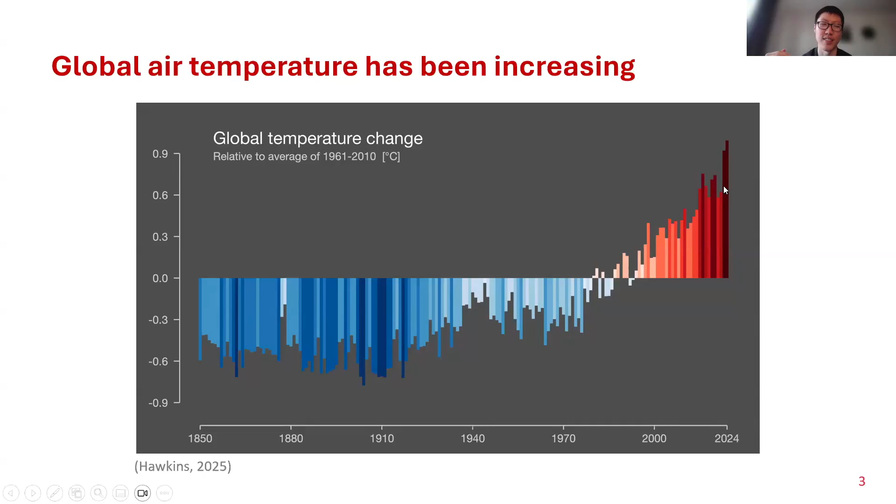When we look at the exact value of global temperature change, we can see that since around the 1970s, the global air temperature has been increasing rapidly, and until recent years we have reached several peak levels of air temperatures.

Heat will cause death because as temperature increases, firstly people will feel discomfort, then get heat stress and even heat stroke. Eventually that will lead to death, especially for vulnerable groups like elderly persons.

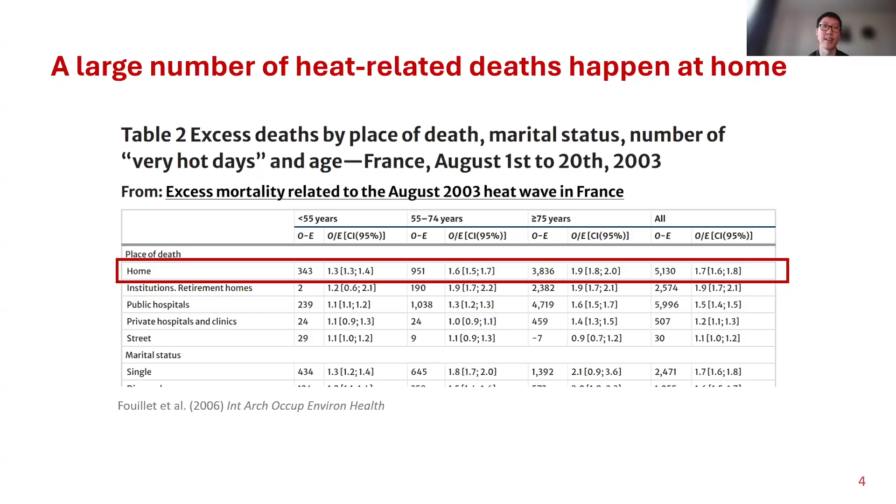That makes us more cautious about the heat resilience of buildings because, for example, in the UK or other European countries, traditionally we've focused on heating, but nowadays overheating is becoming a new issue. There are lots of studies recently focused on overheating of buildings, and guidance like the CIBSE Environmental Guide A has started to have more detailed standards or criteria to assess indoor overheating risk.

Building simulation is an important way to assess or predict building overheating risk, and also to assess the impact of different passive cooling interventions or even energy saving potential for cooling. But for building energy simulations, the important input variable is the outdoor weather condition.

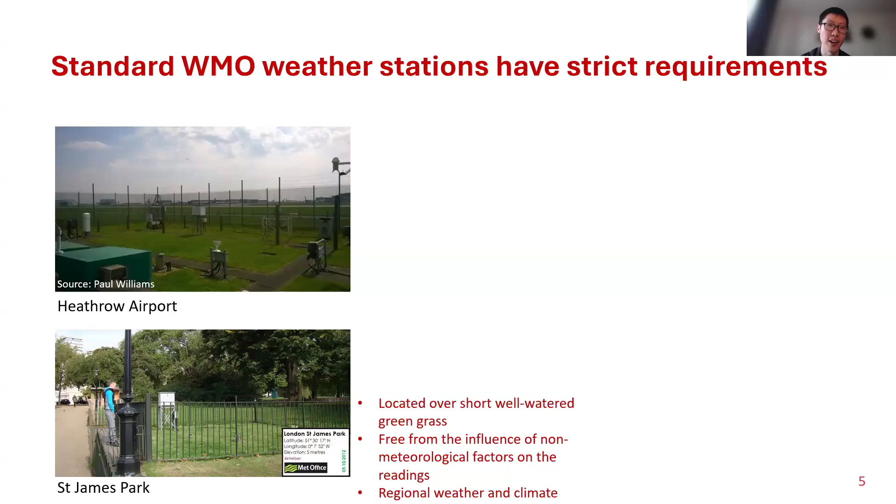Typically, how we get the weather data is from rural weather stations. For example, we use the typical meteorological year data, which uses the last maybe 30 years of data from standard WMO weather stations. But the location of WMO weather stations has strict criteria. Typically, for example, for London, we have lots of standard weather stations.

For example, the most famous one probably is Heathrow Airport, which is used for weather forecasts as well. And for the city center one, we have St. James Park. But still, we feel that both Heathrow Airport and St. James Park actually have very similar surface types—they're all very short grass. That's basically the requirement of WMO weather stations, because it's required to locate them over short, well-watered green grass, and they should be free from the influence of non-meteorological factors on the readings, trying to exclude factors like buildings or anthropogenic heat.

Finally, the purpose of these WMO weather stations is to monitor the weather and climate on a regional scale. So just like when we look at the weather forecast, it says London is forecasted to have a temperature of some degree to a certain degree—that's typically for a regional weather forecast.

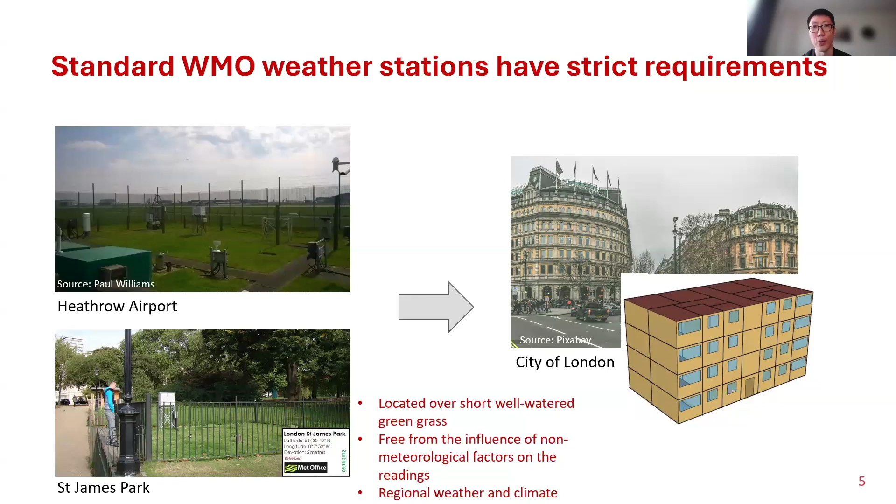But for building simulation, I think in most conditions we are looking at urban buildings, because the city is the form of buildings—most buildings occur in the urban area. But if we are using weather data from relatively rural stations like Heathrow Airport, the question is whether it's representative enough for a building in the center of the city of London.

When we talk about urban climate, one of the most well-studied phenomena is the urban heat island. When I talk to meteorologists about urban heat island, they usually ask what kind are you talking about - the boundary layer urban heat island, the surface urban heat island, the subsurface urban heat island, or the canopy layer urban heat island. When we use the term urban heat island, we usually refer to the canopy layer urban heat island, and these layers relate to another important concept for urban climate.

When studying urban climates, one of the most important things is the scale - which scale are we looking at? For the regional, we have the largest one, the meso scale or regional scale. This is usually used for weather forecasting and covers a whole city and its surrounding areas.

When we zoom in, we have the local scale, or neighborhood scale, comprised of buildings and streets. Zooming in again, we get the micro scale, which consists of the building and its surrounding microclimate. Micro scale is typically what we as building researchers are most interested in, because it's the exact surroundings of the building itself that we're trying to understand. That's also an important input factor for building energy simulation.

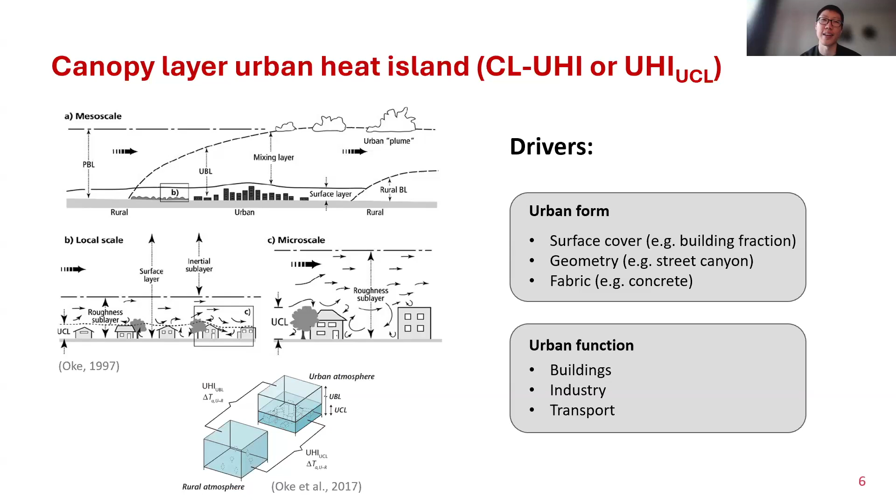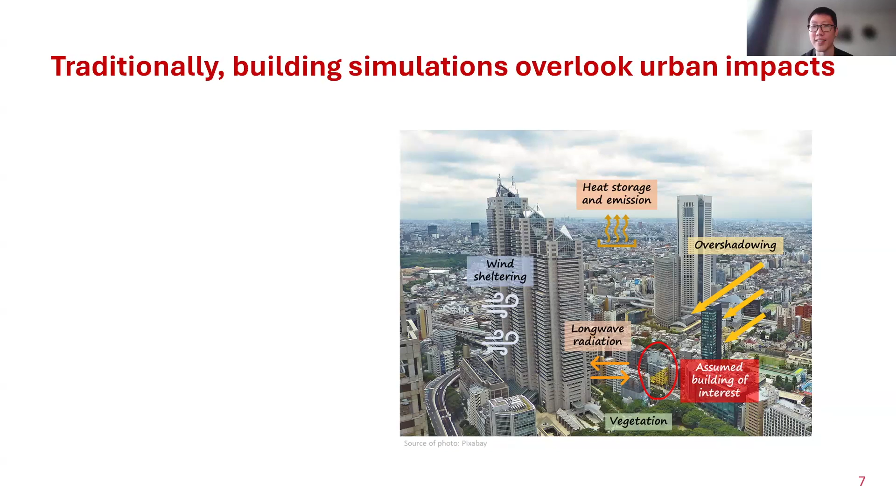Some vegetation areas may provide little cool islands within cities, and the building fabric has heat storage, plus there are heat emissions from human activities. All of these factors need to be considered when simulating a building in an urban area.

When we talk about the interaction between buildings and their surrounding urban areas, typically this relationship is mutual - it's two-way. The urban climate influences buildings in terms of energy performance, indoor thermal comfort, and sometimes indoor air quality. Buildings in turn influence the outdoor climate due to heat emissions or air pollution. However, a gap in existing methods is overlooking the impact of urban factors on building thermal or energy performance.

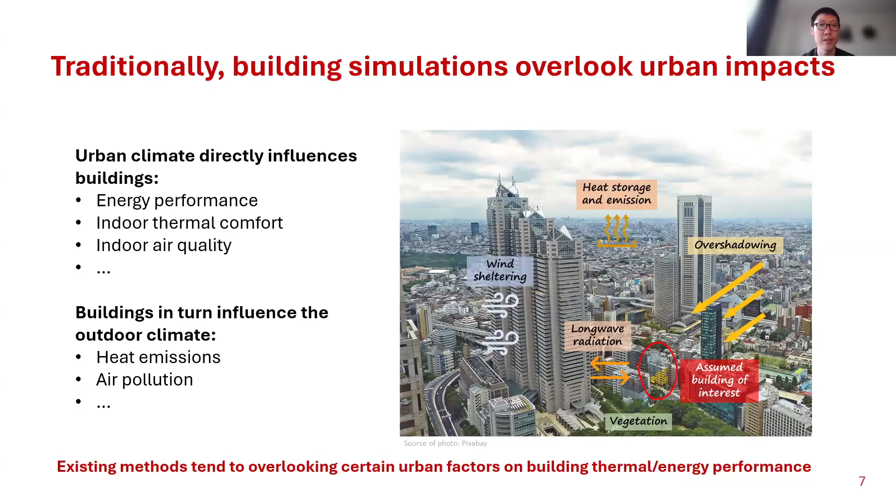The first one is about long-wave radiation trapping. What is the impact of interbuilding long-wave radiation exchange on building performance?

The second is about urban wind and air temperature, and importantly the vertical profiles, because it's not just about the wind speed or air temperature at a certain height, it's about the whole profile. How will this influence the performance of buildings or the input for building simulations?

The third one is the feedback of building anthropogenic heat emissions to outdoors. Traditionally, when we run building simulations, we only use weather data as the input, so it's a one-way process. We input the weather data and get the results, with no influence back to the weather data. But actually, in reality, the building itself also generates heat, which influences the outdoor climate as well.

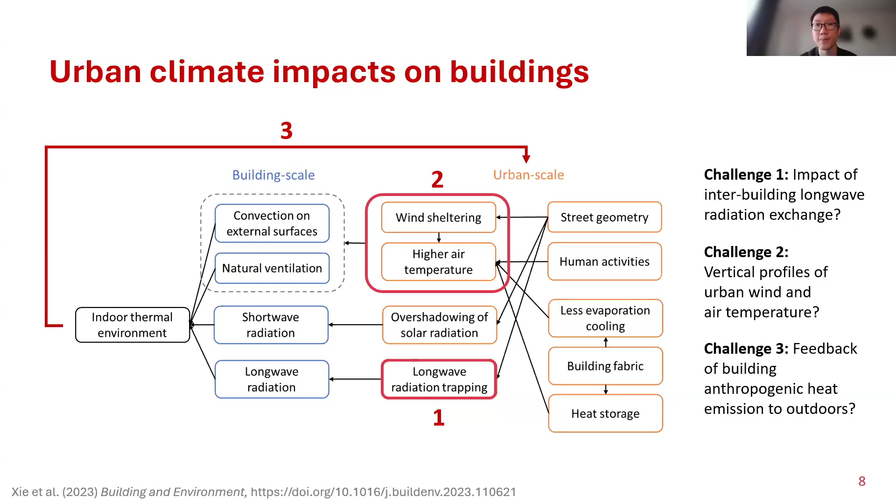So these are three challenges in terms of building simulations. We'll talk about these one by one. First, the long wave radiation.

A typical assumption in lots of building energy simulation tools is that the adjacent building surface temperature is equal to the air temperature, because it's very difficult to obtain the actual surface temperature of the surrounding buildings.

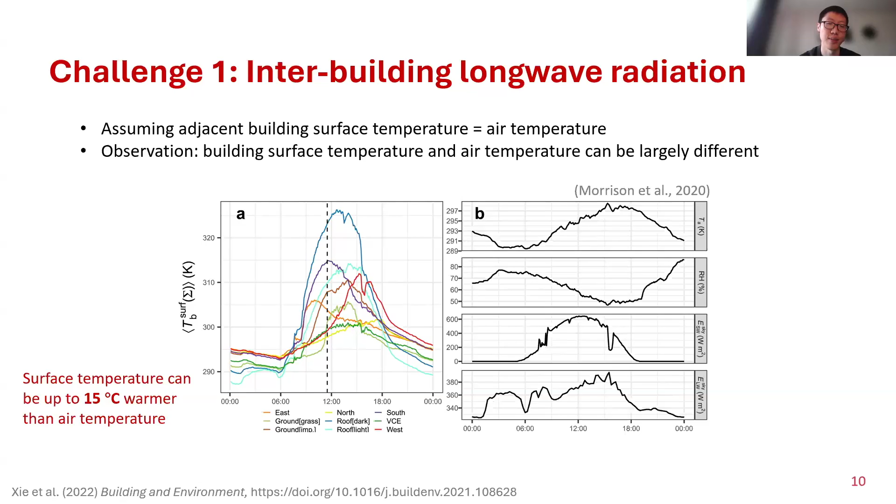There are some existing methods trying to model the interbuilding long-wave radiation. The first one is coupling with urban climate models. For example, there are studies coupling building energy simulation tools like EnergyPlus with urban climate models like ENVI-met.

But this is typically complex because models like ENVI-met are CFD-based, so they're very computationally expensive. Running a model like this typically takes lots of time. For example, running a 7-day case will probably take more than 3 days.

Another way is for building energy simulation tools only. Tools like EnergyPlus make some assumptions to compromise. Firstly, assuming the adjacent building surface temperature equals the air temperature.

That's the default option in EnergyPlus, and it's the most widely used assumption in most studies. Or secondly, assume that adjacent buildings are isolated, so they have surface temperatures as an isolated building. But both methods can cause large biases due to the difference between air temperature and surface temperatures.

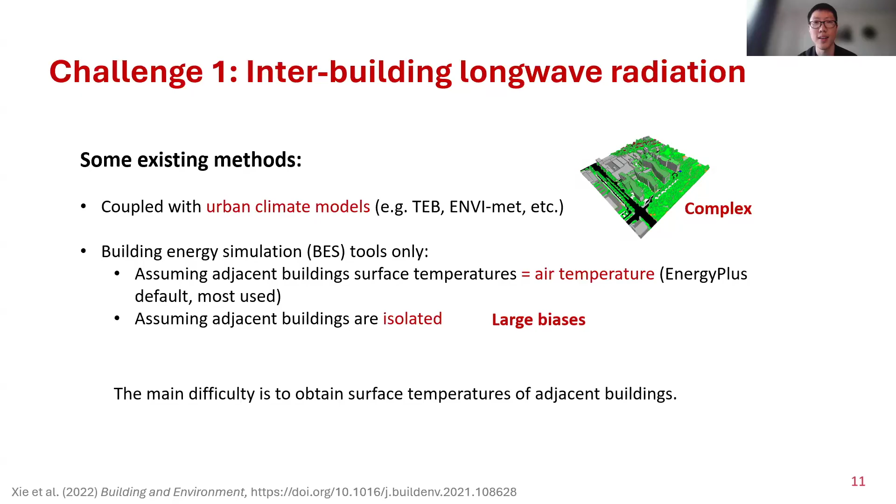Still, the main difficulty is to obtain the surface temperature of adjacent buildings. Here we propose an approach using an iterative method, assuming we have the building in an idealized neighborhood made of identical buildings.

In this case, we assume that all the buildings should have the same surface temperatures. For example, the surface temperature of the south wall of the target building should be the same as the south wall surface temperature of the adjacent building, because all the buildings are assumed to be the same.

It's still a compromise, but it's one step ahead from the default assumption. Using this approach, first we assign the initial surface temperature to the surrounding buildings, for example whether it's the air temperature or the isolated surface temperature, and we run the simulation.

In this case, we need the view factors and the surface temperature as a schedule to be input to EnergyPlus. There's a function called environmental parameters in EnergyPlus which could be used to calculate the long wave radiation. By doing so, we can get the updated surface temperature of the target building, which already considers the effect of long wave radiation from the surrounding environment.

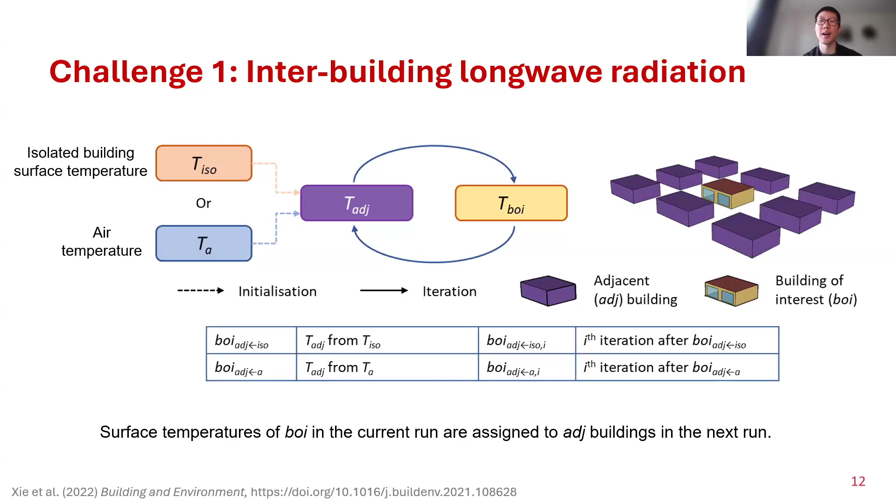We have validated our results with observations. We used a concrete block site located in Japan, which has observations of the surface temperatures of these blocks. This basically shows a similar setup to our assumptions, which is the idealized neighborhood with identical buildings.

When we compare our modeled surface temperatures of each facet with the observations, we found that using the default settings, shown in blue, which assumes surrounding buildings have surface temperatures equal to the air temperature, will largely underpredict the surface temperatures of these concrete blocks. By using the updated, iterative approach we've proposed, we see some increases in surface temperature, making the results closer to the observations.

But still, we see some gaps here, which can be due to differences in the ground surface temperatures or the thermal characteristics of the concrete and so on. Still, we see improvements from the default method compared to the observations.

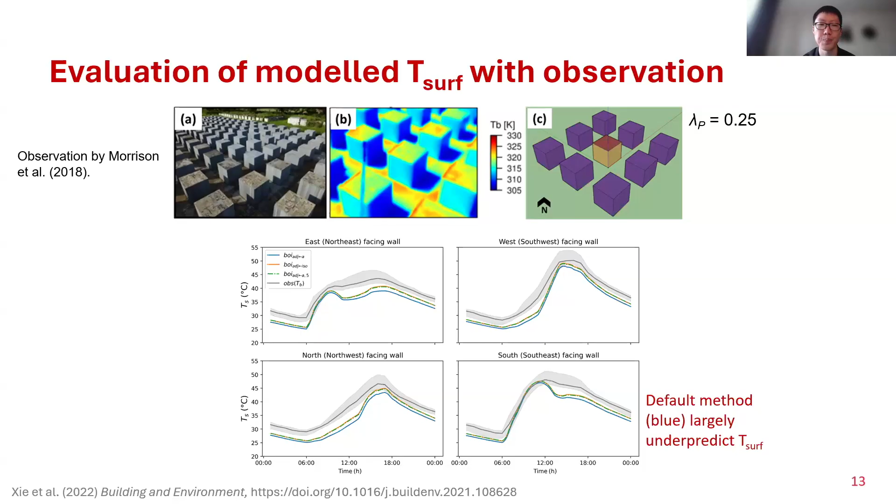We are interested in how the long wave radiation exchanges between the target building and surrounding environment will impact the building itself, because this has largely been overlooked in past studies.

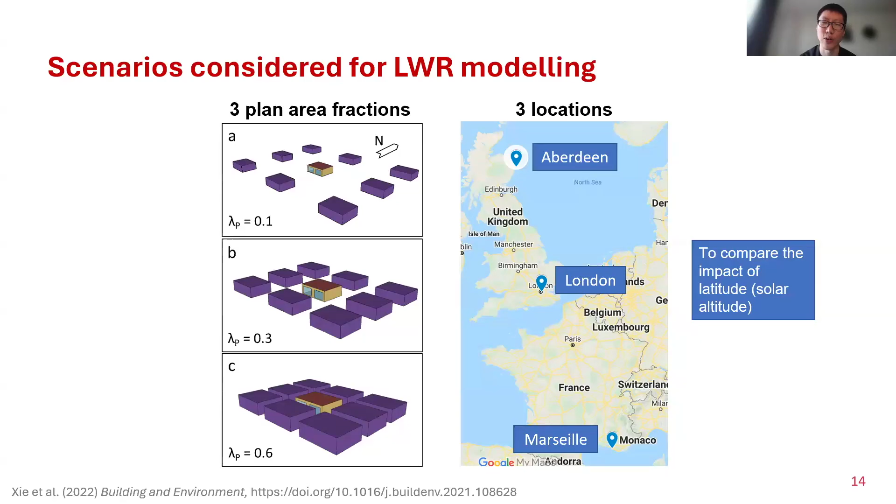So we consider three plan area fractions for building densities, from 0.1 to 0.6, representing a typical open space to a typical dense neighborhood. We also consider three locations: Aberdeen, London, and Marseille. These three cities have similar climates but different latitudes, allowing us to compare the impact of latitude or solar altitude on the long wave radiation impacts.

The results: first we look at the north-facing wall surface temperatures at different building densities in London, showing the temperature difference between the updated method and the default method. We can see that in summer, there's a temperature difference of up to around 4 degrees during noon time, with the improved method showing higher surface temperatures.

In winter, we see some differences too, but although the value is smaller, it's still around 1 degree compared to the default scenario. This basically indicates that as the neighborhood becomes denser, the impact of long wave radiation is larger because of the view angle.

The long wave radiation is a function of the surface temperature and the view factor between the target building and the surrounding surfaces. As the buildings get closer, we have larger values of the view factor or view angle, which increases the impact of the long wave radiation.

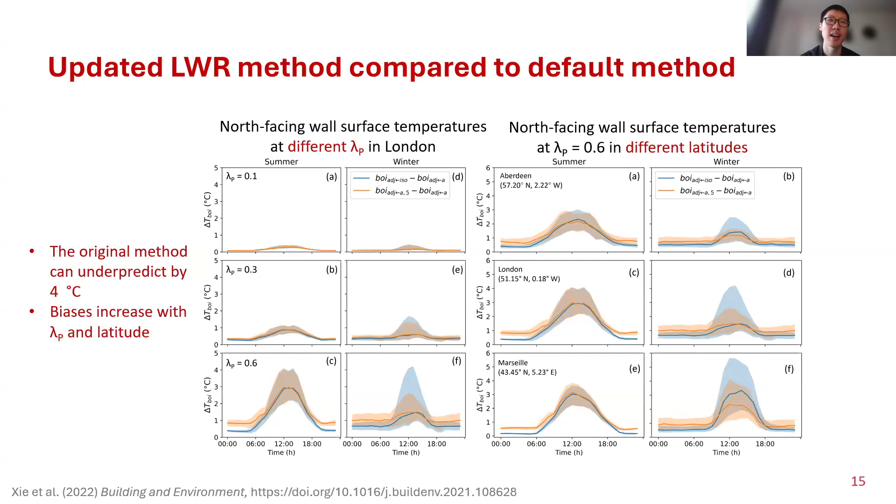When we have a higher solar position, there will be more solar radiation on the south surface of the building, leading to a larger surface temperature difference between the south surface of surrounding buildings and the target building's north surface. This leads to larger differences in terms of the long wave radiation. So this is basically how long wave radiation impacts surface temperature.

Now we step ahead to look at how this impacts the indoors. Here we use the internal cooling and heating load as an example. For London, we set the heating and cooling set points at 20 degrees and 27 degrees, and found that it actually makes some differences.

The load difference between the updated method and the default method shows a difference of 4 watts per square meter for the summer cooling load, and up to around 1.5 watts per square meter in terms of the winter heating load. Looking at the percentage difference in energy demand, this equals an annual cooling energy consumption around 13% higher and annual heating energy consumption 5% lower.

When we think about the threshold set by ASHRAE Guideline 14, which is the criteria for building energy simulation, it's typically an error above 10% that should be seen as large. So for this cooling energy consumption, the 13% difference is something we should be careful about.

Basically, this indicates that long wave radiation, although it has been largely overlooked in previous studies, still should have certain impacts on building performance, especially for dense neighborhoods or low latitude cities, because they're receiving more solar radiation on the surrounding building surfaces.

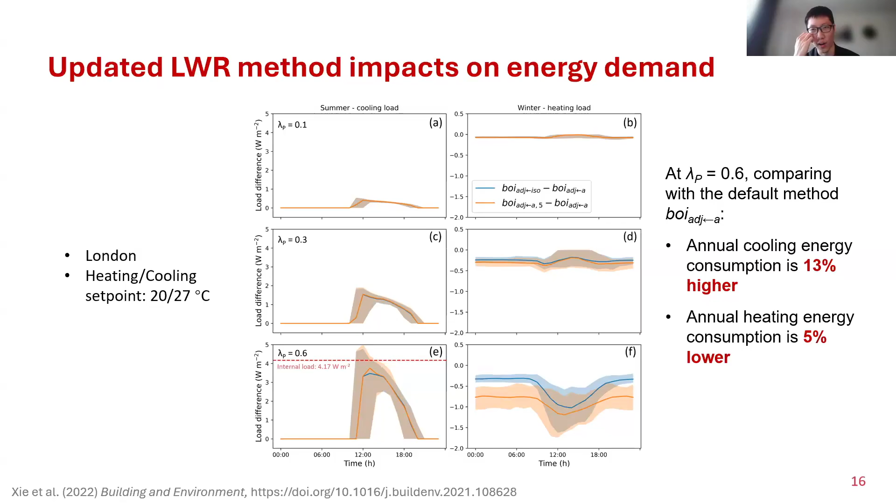The second challenge is the urban air temperature and wind speed, as well as their vertical profiles. How will this impact building energy performance? There are also different ways to assess this kind of urban climate impact.

I'll just start from this slide. Sorry about the internet. The model we are using is called SUEWS, in full, the Surface Urban Energy and Water Balance Scheme.

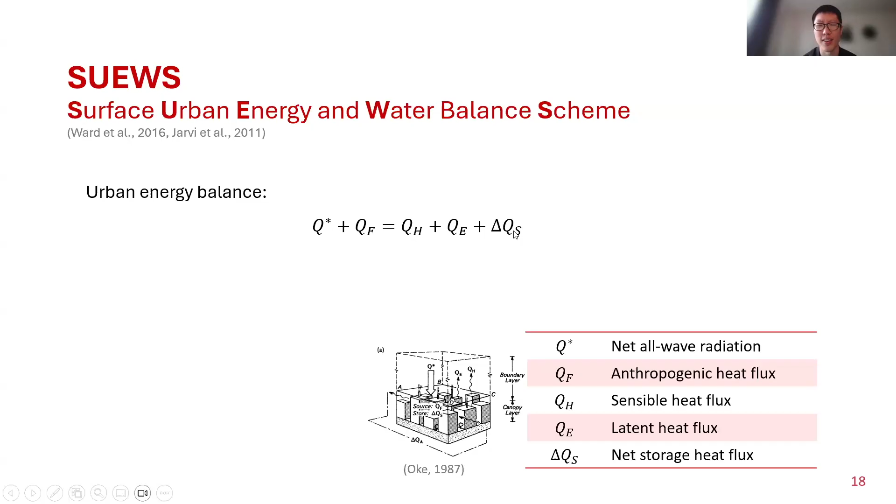It's based on the urban energy balance, where for the urban surface, we have the incoming energy of the net all-wave radiation and also the anthropogenic heat, which is generated from human activities. For the output, we have the sensible heat flux as QH, latent heat flux as QE, and net storage heat flux in the urban surface, which is delta QS.

So how does SUEWS model this? Basically, it requires inputs pretty similar to building simulations like EnergyPlus. It also requires two sets of input data: the first is climate forcing data, and the second is surface characteristics. With this information, SUEWS can model the surface energy fluxes and therefore derive the wind, temperature, and humidity profiles within the urban canopy layer.

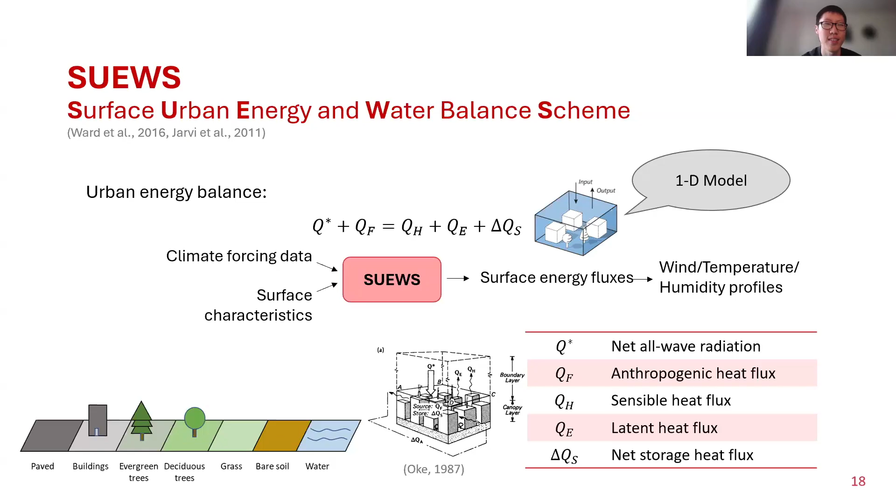SUEWS considers 7 surface types and is a 1D model, which only considers vertical variability, not horizontal. So horizontally it's modeling horizontal average values, but we only have vertical differences. Because it's a 1D model, it's very computationally efficient, and when combined with EnergyPlus it's basically very fast. Typically, running SUEWS for a whole year only takes around 1 minute, so that's very fast.

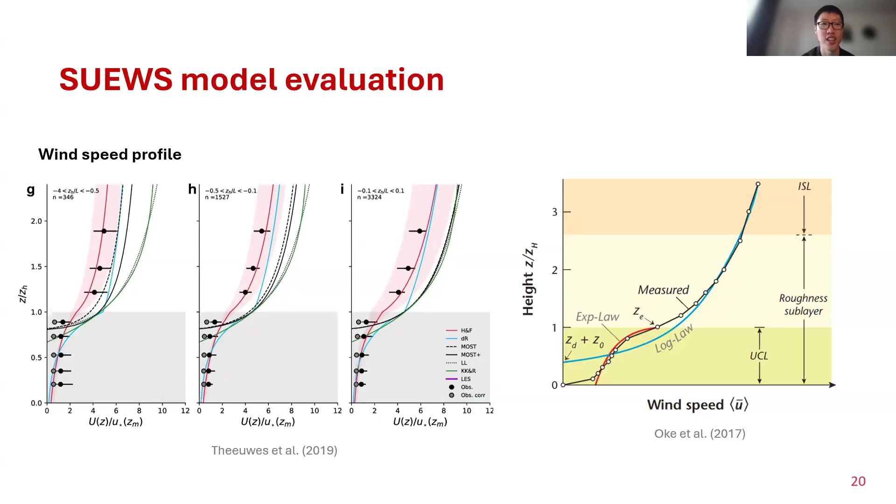Another thing we need to look at with the wind profile is its shape, because typically when we do building simulations in EnergyPlus, it provides a power law profile which has an exponent and a factor called the boundary layer depth. But in reality, the wind profile is quite complex.

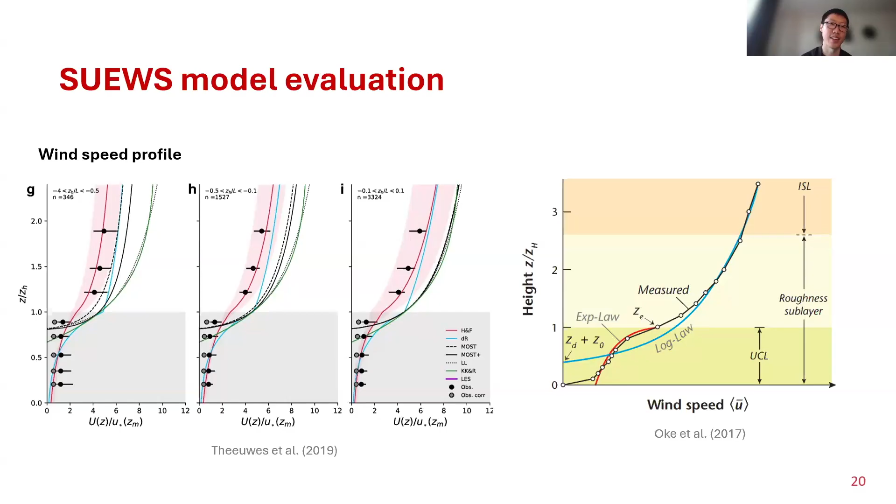When we look at the right figure, the dots show the measured points. We can see that beyond the urban canopy layer, which has the height of the mean building height, the profile follows a log law, but within the urban canopy layer, below the building height, it follows the exponential law. So it's quite different from EnergyPlus, because typically building simulations adopt a simpler format which is easier to use.

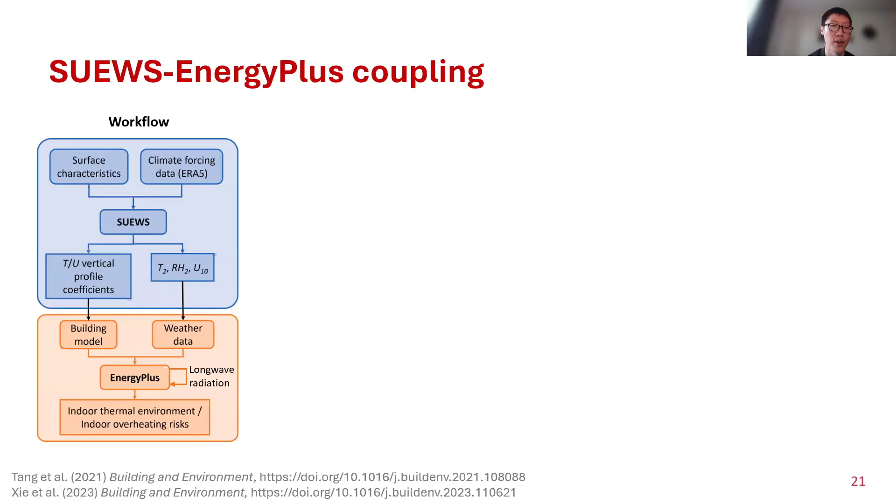The workflow of SUEWS-building coupling is that SUEWS uses these inputs and models air temperature, relative humidity, and wind speed. These values are provided for different heights within the urban canopy layer, but EnergyPlus only requires weather data for air temperature at 2 meters, relative humidity at 2 meters, and wind speed at 10 meters. So we also need to provide another set of coefficients, the air temperature and wind speed vertical profile coefficients, following the power law of EnergyPlus, so it can be used directly without needing any changes to the source code of EnergyPlus. With this information, EnergyPlus can model the indoor thermal environment and the indoor overheating risks.

Now let's get back to the relationship between the urban scale factors and building scale factors. We just talked about the longwave radiation trapping using the iterative approach, and now we additionally have the wind sheltering effect and warm air temperature considered with the SUEWS modeling.

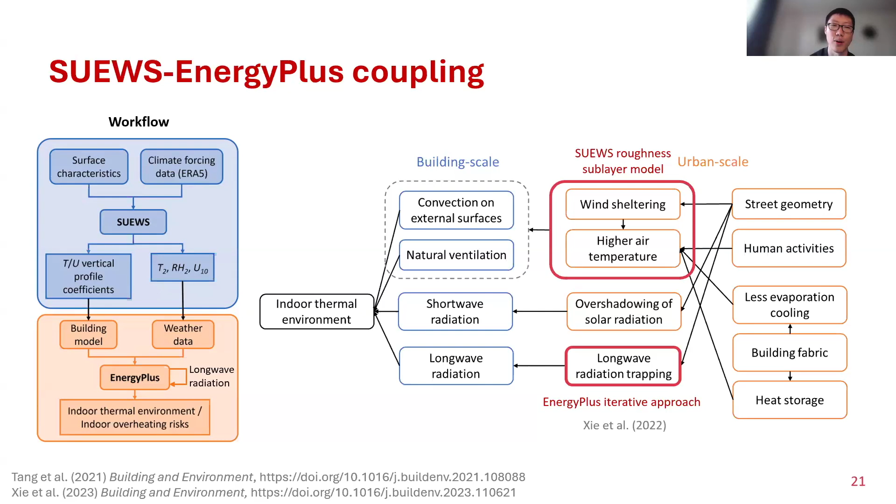One question we're interested in is how each individual urban factor can influence building energy performance. So we look at three climates: Singapore, representing a low latitude city; Shanghai, representing a mid latitude city; and London as the high latitude city. We use the TMY data for the climate forcing data for SUEWS, because typically SUEWS requires forcing data from a certain height above the roughness sublayer so that it's not influenced by the urban surface. So the rural sites are pretty ideal for this case. Here we assume a building plan area density of 0.6, representing a quite dense neighborhood.

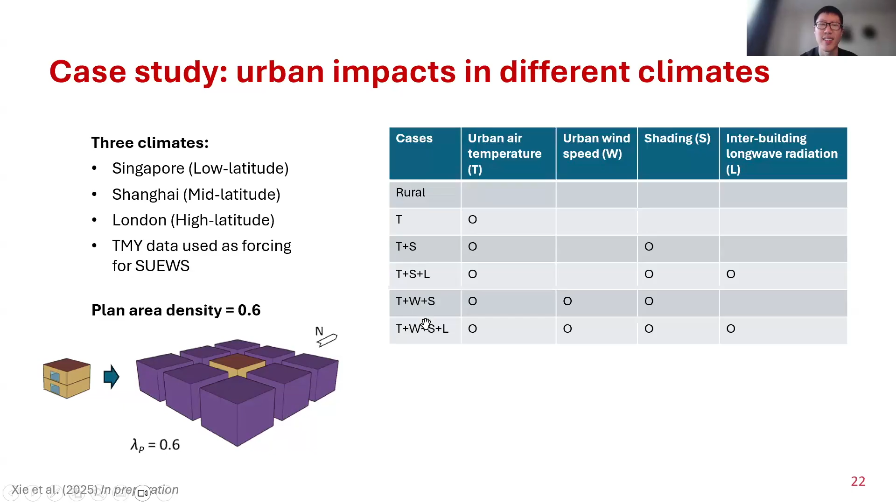For the cases, we tried to think about the most common cases existing in current research. First is rural - we just use the rural weather data and assume the building is isolated. Then we have the urbanized air temperature plus shading, shown as T+S. We have longwave radiation additionally considered, and we have wind speed considered, and finally all of these four factors considered together. For metrics, we use the indoor overheating risk and also the cooling and heating demand.

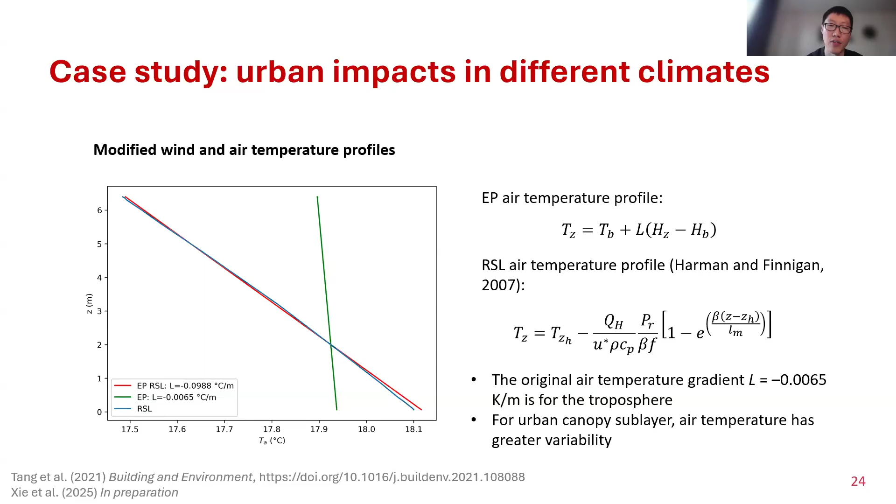When we look at the wind profiles modeled by SUEWS, the blue line here typically shows the exponential law, but EnergyPlus by default uses the power law. So what we can do is fit the curve using the power law and get the coefficients, which can be used in EnergyPlus directly. Similarly for air temperature, EnergyPlus assumes a very small value of temperature gradient, but SUEWS provides a larger one due to the larger temperature variations within the urban canopy layer.

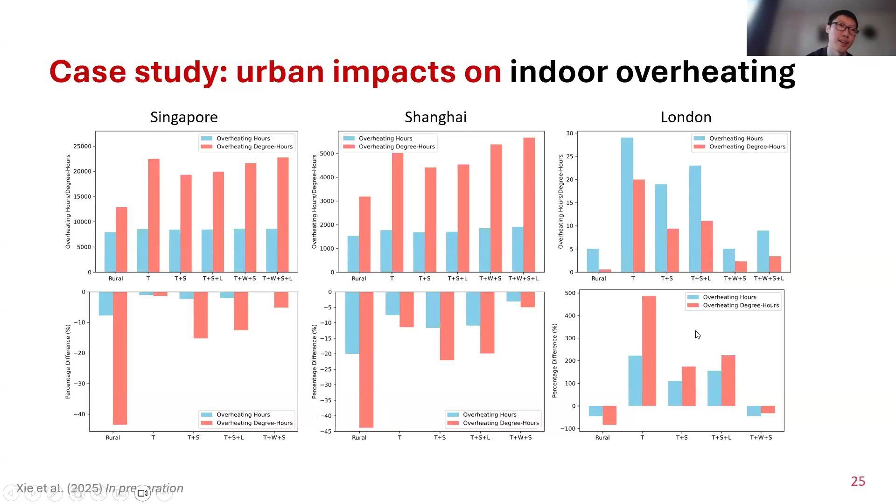As a result, we look at the indoor overheating risk first. We can see for different climates, the rural setting is largely under-predicting the overheating risk, but this can vary between different climates. Also, we found that each individual urban factor is pretty important. For example, if we just miss the urban wind speed, we get around 15% under-prediction for the Singapore case, and for the London case, the value is much higher because London has a relatively high wind speed.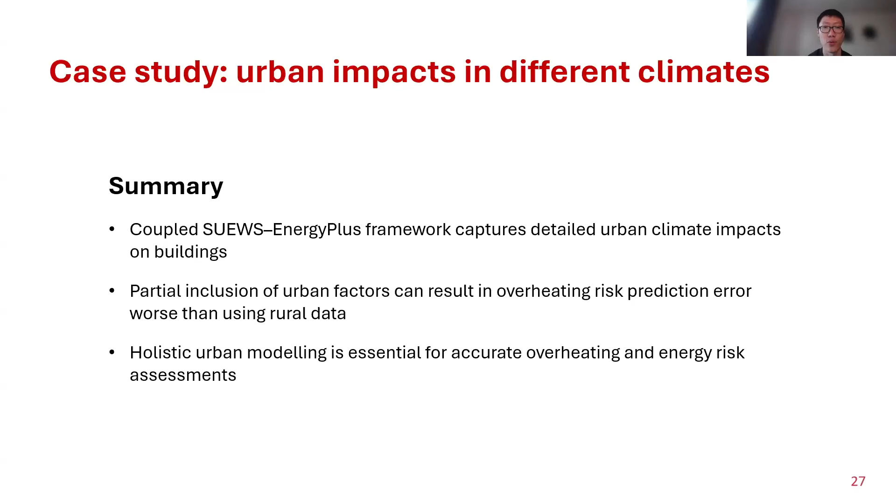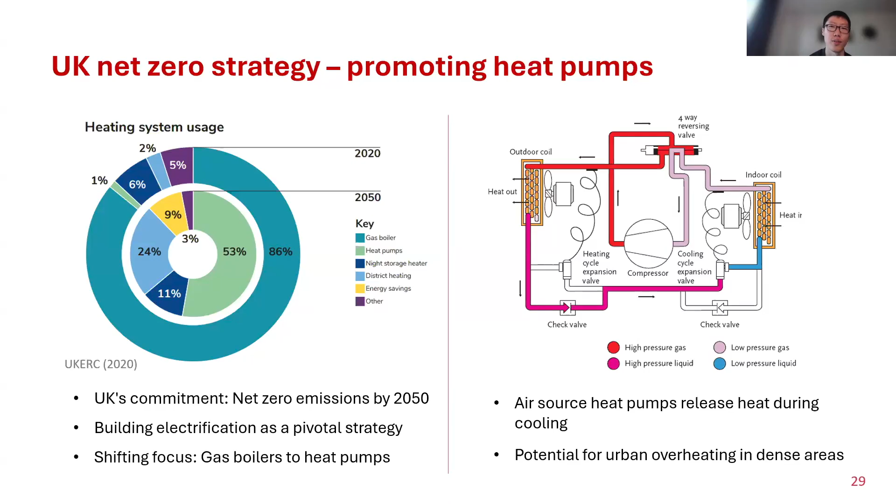Now we come to the third challenge, which is the building anthropogenic heat feedback. Just for background, building energy is a large contributor to global heat emissions and CO2 emissions, and a key goal to achieve net zero is replacing gas boilers with heat pumps. When heat pumps provide cooling, they remove heat from indoors to outdoors, and when providing heating, it's the opposite. So there's a risk that in the future, when the UK has both heating and cooling climate needs, this could increase the outdoor temperature due to the use of air source heat pumps, or decrease the winter air temperature due to heating with air source heat pumps.

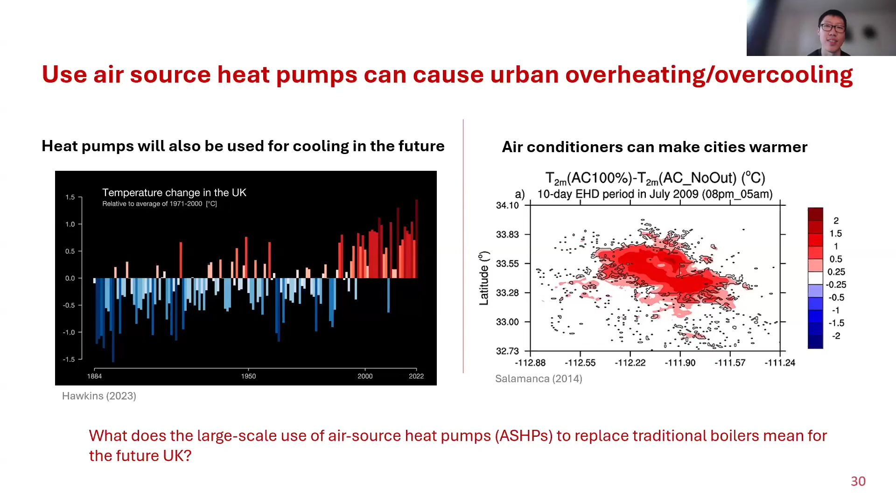So here we consider an updated definition of building anthropogenic heat emissions, which is basically calculating the waste heat from the buildings by calculating the difference between an occupied building and an unoccupied building. Basically, that's the amount of heat released from buildings, and this value we can easily obtain from the...

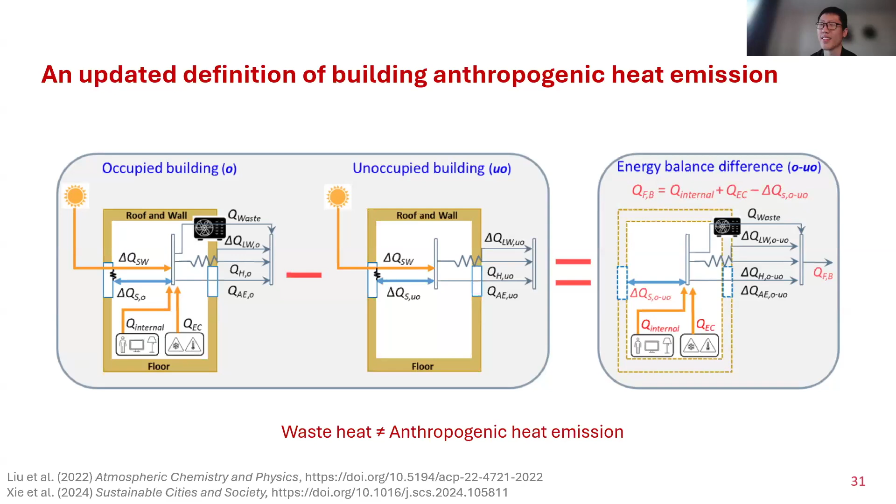EnergyPlus simulation. As the feedback, we have the workflow from SUEWS to EnergyPlus, and now EnergyPlus provides the building heat emission, and we can put that value back to SUEWS as the climate forcing data, so that SUEWS can update the air temperature, considering this kind of building heat emission effect.

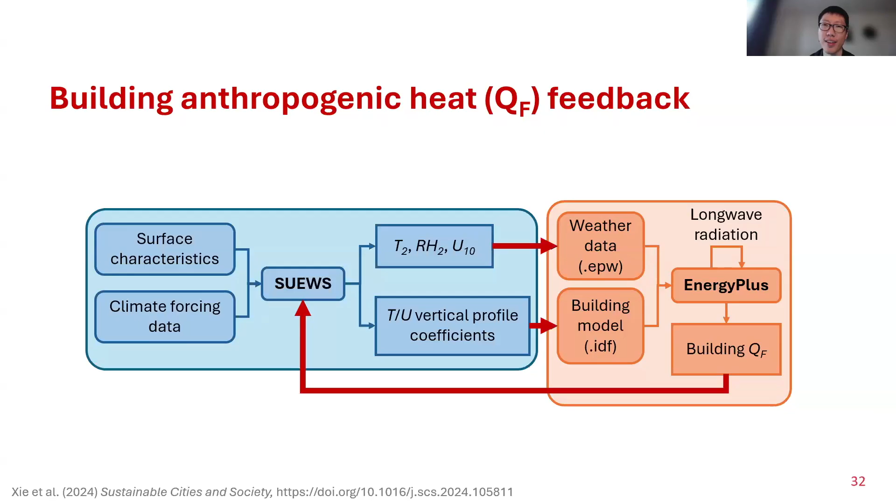As the scenario, we look at two common building types in the UK, which are flats and detached houses. We use realistic building occupancy behavior, considering an elderly couple at home throughout the day, and they only use the air source heat pump or gas boilers when the rooms are occupied.

So it's typically an optimistic scenario. We look at 9 UK locations from the south, which is Plymouth, to the north, Aberdeen.

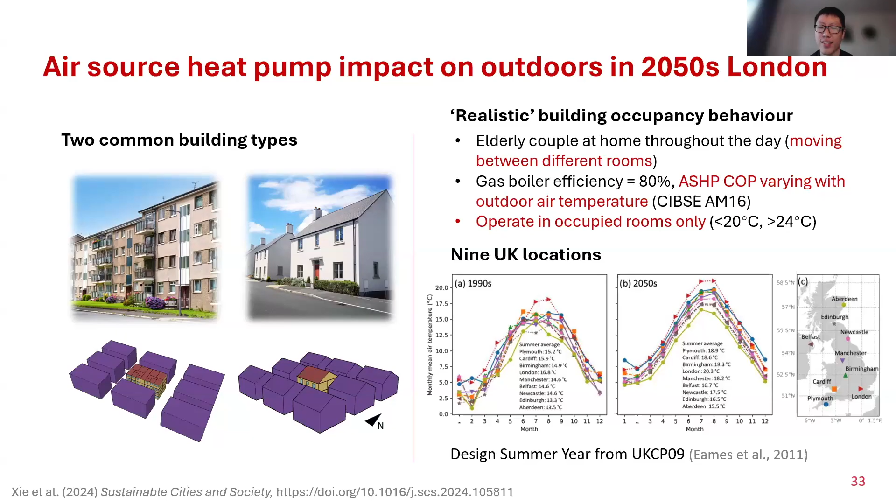Because we are looking at the future scenario of the 2050s, we use the climate projection from UKCP09. Here are the results of the building heat emissions using gas boilers or air source heat pumps.

We can see that during winter time, the red line here, representing gas boilers, has a pretty high value compared to air source heat pumps. But air source heat pumps have a higher value typically in summer due to the cooling.

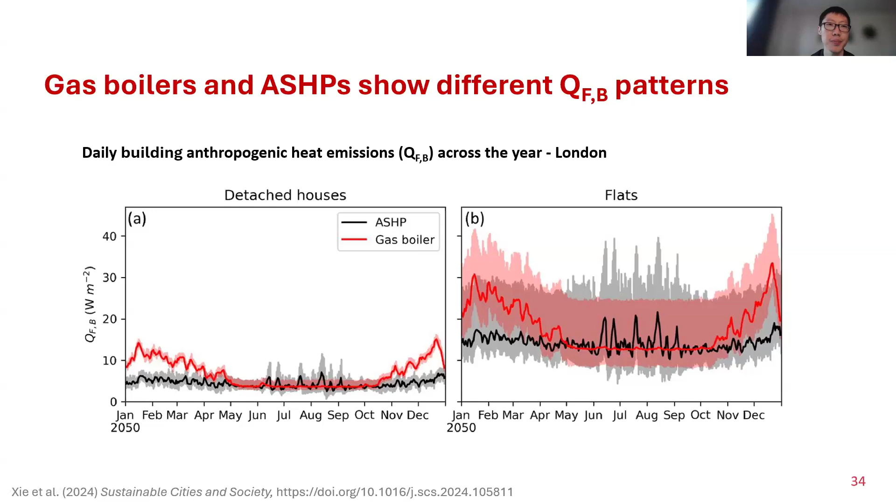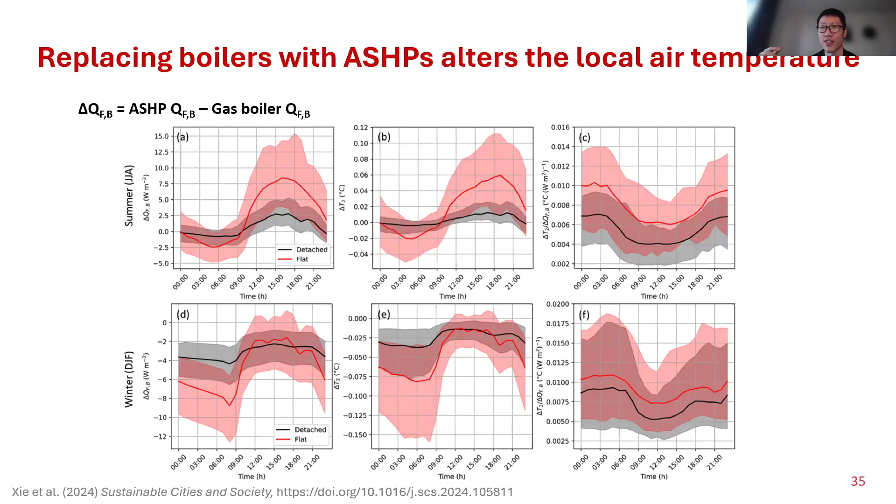These values are quite small actually, but we are still looking at a residential neighborhood with low-rise buildings. In central London, for example, with high-rise commercial buildings, we expect this impact could be larger. Also, in different climates, we found that this pattern largely follows the demand of cooling or heating - it increases as the summertime temperature increases, decreasing as you go north, and in winter it's opposite.

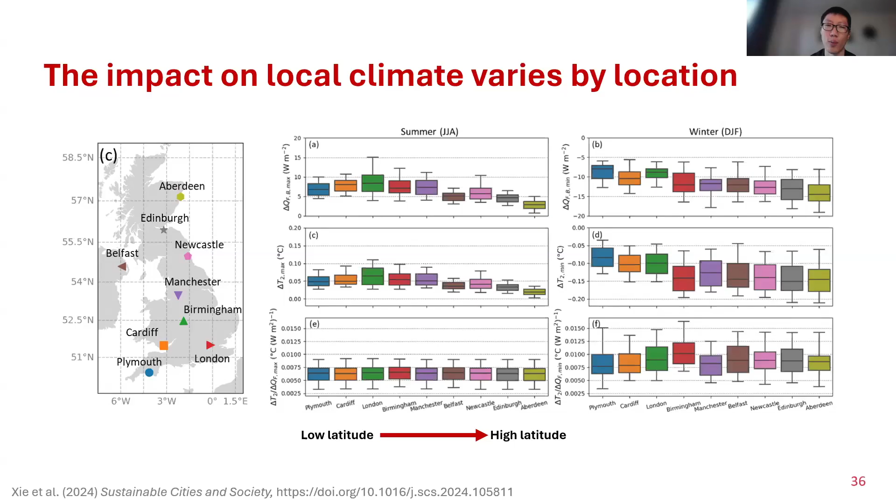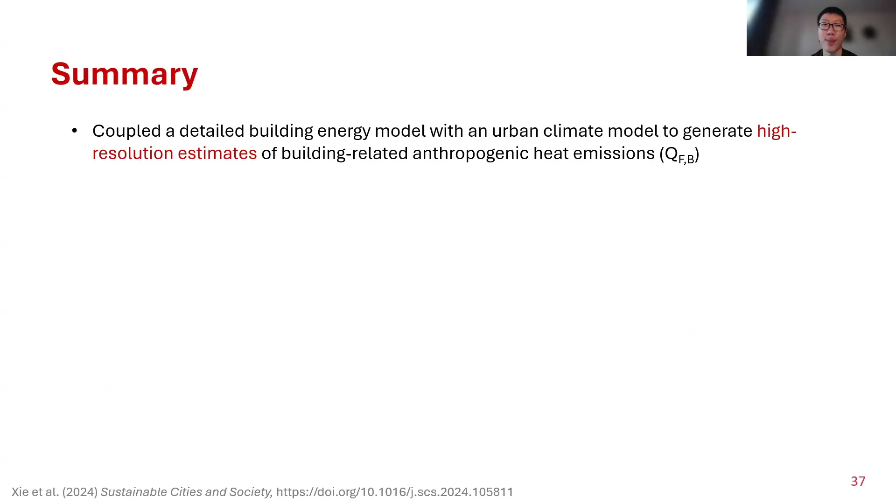So as a summary for this study, basically it's one step forward from the one-way coupling, as we further consider the feedback from buildings to the urban environment. By replacing boilers with air source heat pumps, we can see there's some increase in outdoor air temperature in summer and decrease in outdoor air temperature in winter.

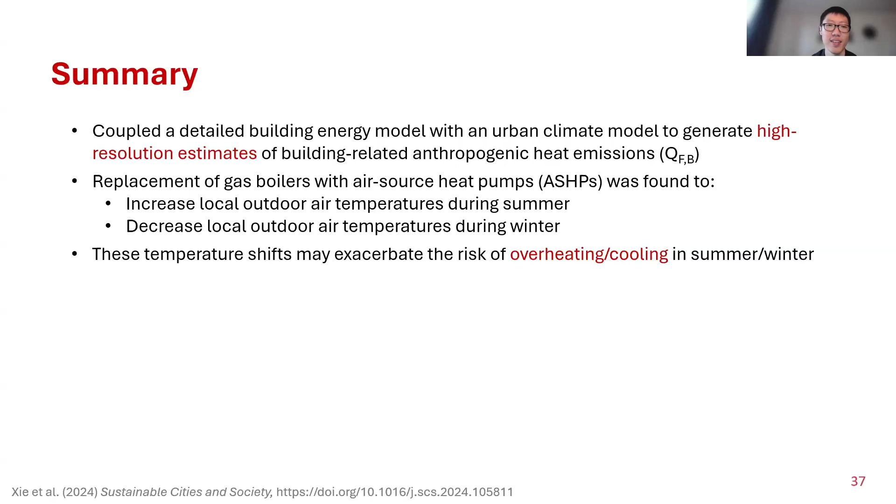These values can have certain unintended risks, increasing the risk of summer overheating or winter overcooling. This should be particularly important for vulnerable households, because there might be a case where certain households could not afford an air source heat pump, but when their neighbors are using one, it will impact their own thermal performance, thermal comfort, and energy bills. So that's another study we are working on.

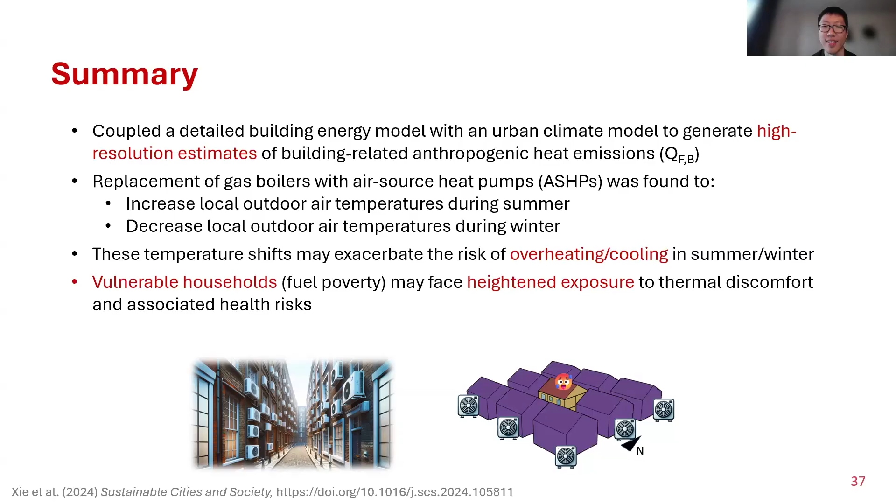So some final tips for how to use SUEWS. If you are interested, SUEWS is open source software, or a Python package exactly. There's a very complete user's guide, so you can just Google it, and on GitHub you can see the full source code of SUEWS.

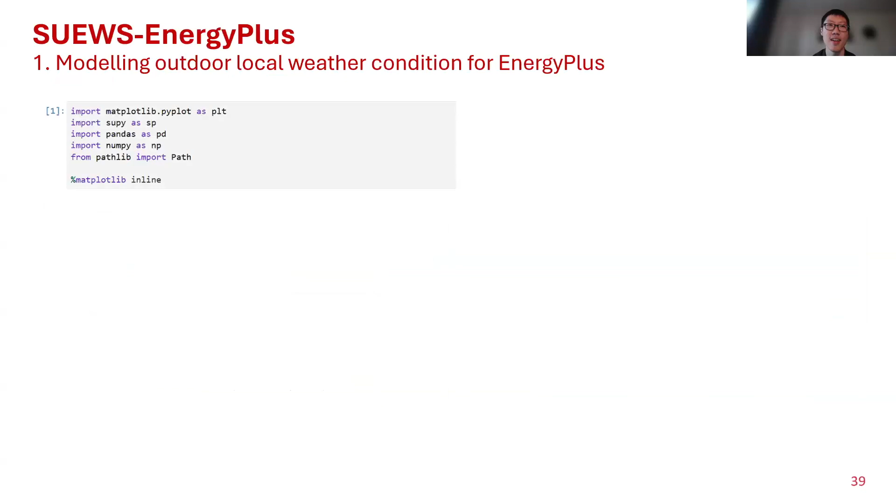Because it's a Python package, it basically needs only a few lines to run the model, but it requires some certain input coefficients, some of which can be easily obtained, but some are not. So what we are currently working on is creating a database that includes different sets of example input factors for users to use.

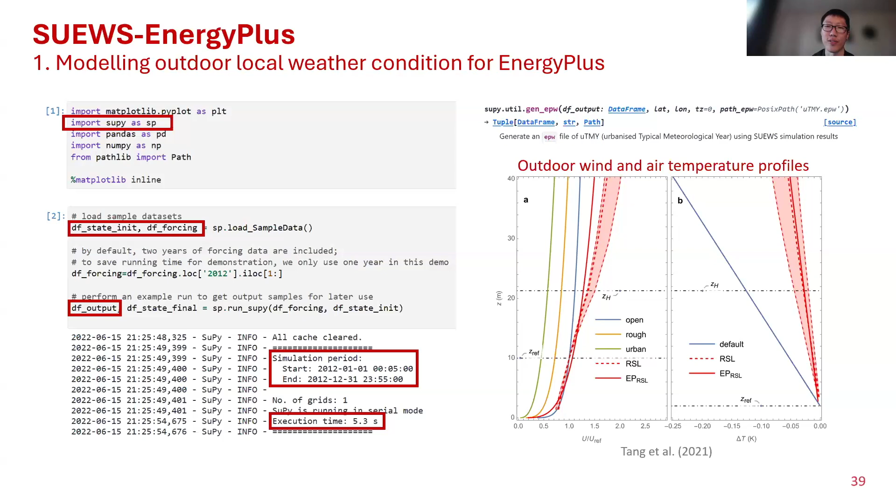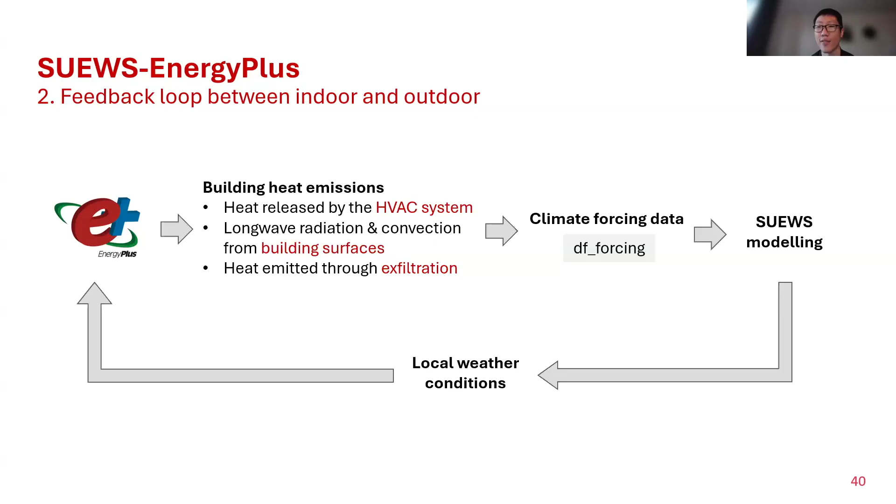And for the feedback, so EnergyPlus just provides the building heat emissions, which can be added to the climate forcing data of SUEWS, and SUEWS runs the model to generate the EPW file again for EnergyPlus simulation. So that's it for my talk. Thank you for listening, and I'm happy to take any questions.